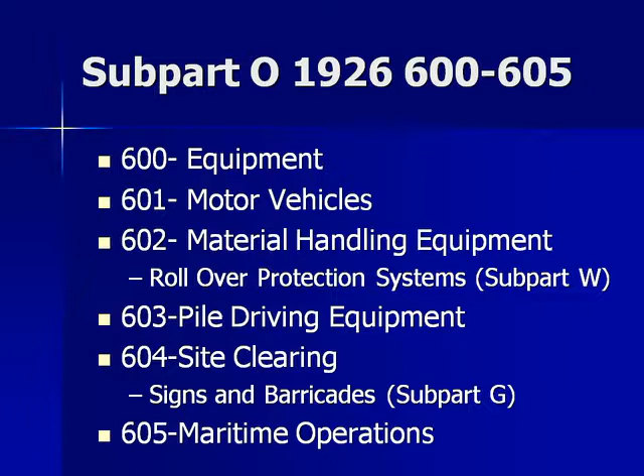Most frequently cited violations for Subpart O. 61 violations: earth moving, compacting equipment, reverse signal alarm. 42: bidirectional machines, horns. 41: industrial trucks, ANSI

B56.1-1969. 38: vehicles with obstructed rear view, alarm, observer. 31: lifting, hauling equipment, use of safety platform.

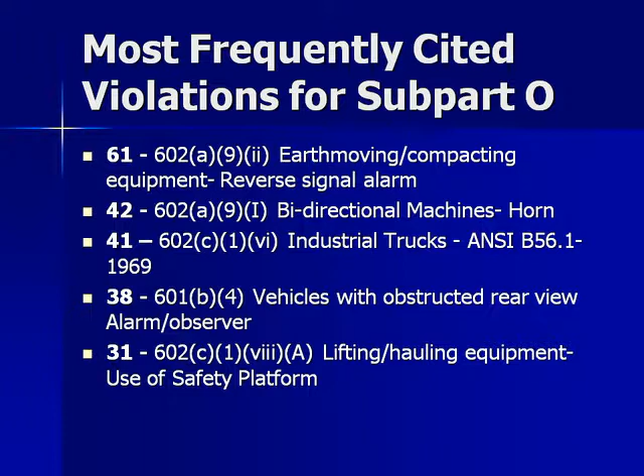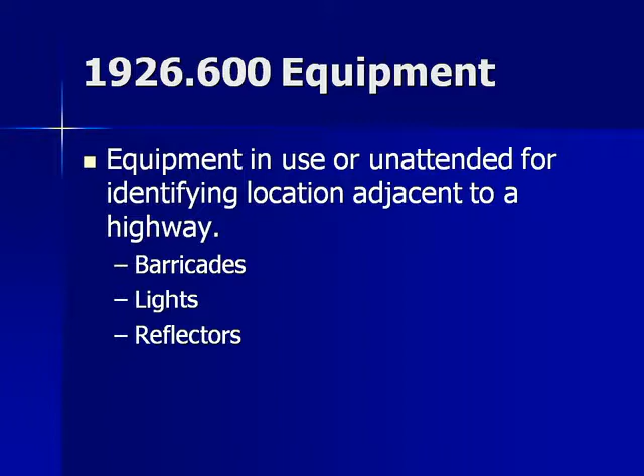1926.600 Equipment. Equipment in use or unattended for identifying location adjacent to a highway: barricades, lights, reflectors. Equipment maintenance. Maintenance of job site equipment. Wheels: split rims or locking ring requirements. Inflating, mounting, dismounting. Tires shall have a safety tire rack, cage.

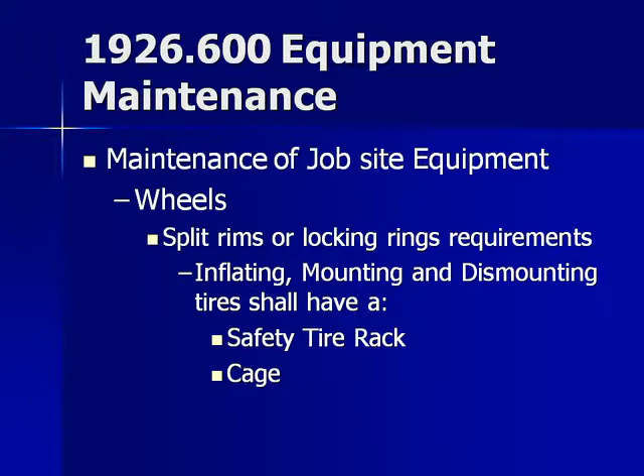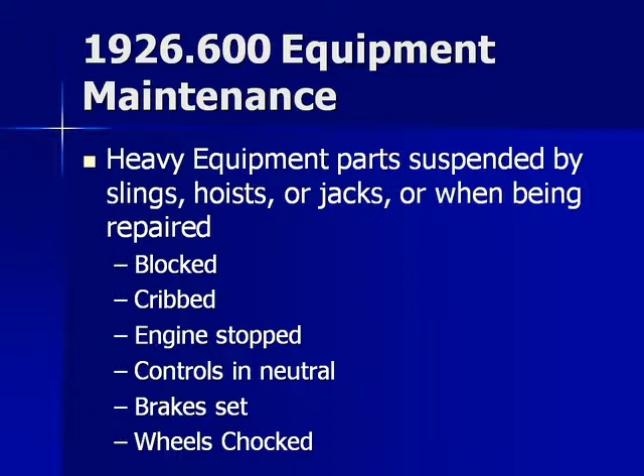Equipment maintenance. Heavy equipment parts suspended by slings, hoists, or jacks, or when being repaired: blocked, cribbed, engine stopped, controls in neutral, brakes set, wheels chocked. Equipment maintenance. Cab glass: safety glass. No cracked glass, no broken glass.

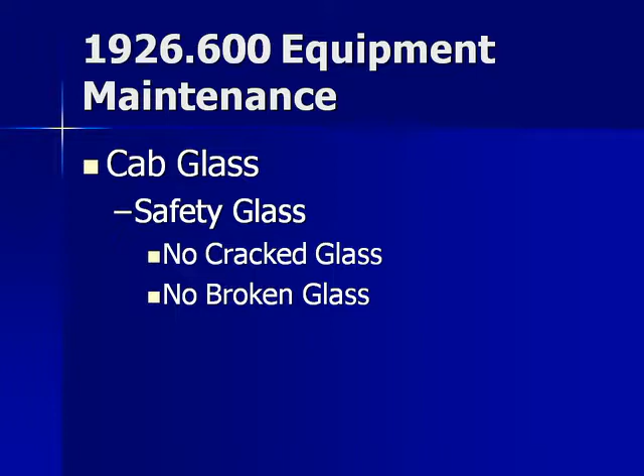Batteries. Charging. Caps in place. Vent caps are functioning. PPE: face shield, aprons, rubber gloves. Emergency eye wash within 25 feet.

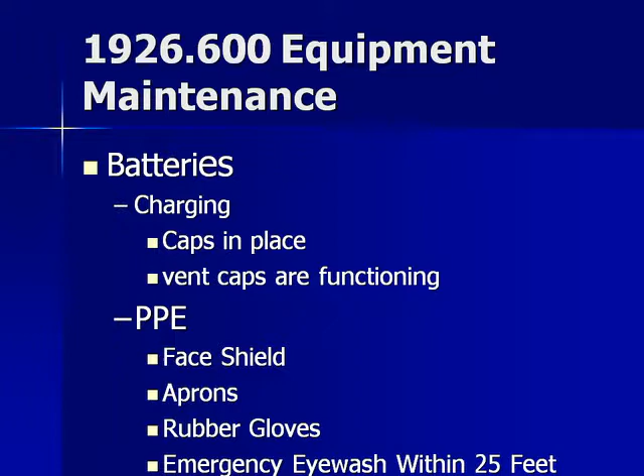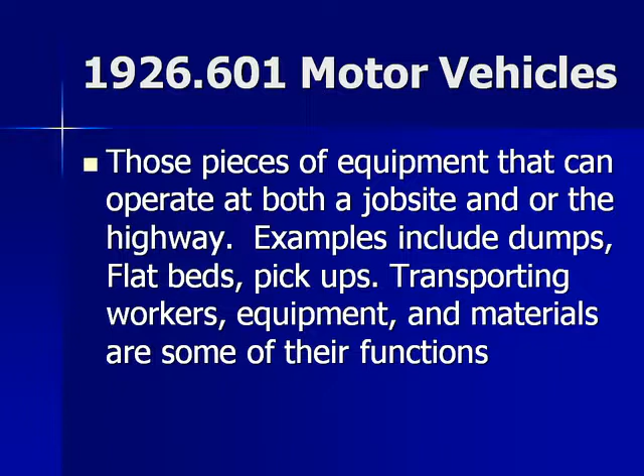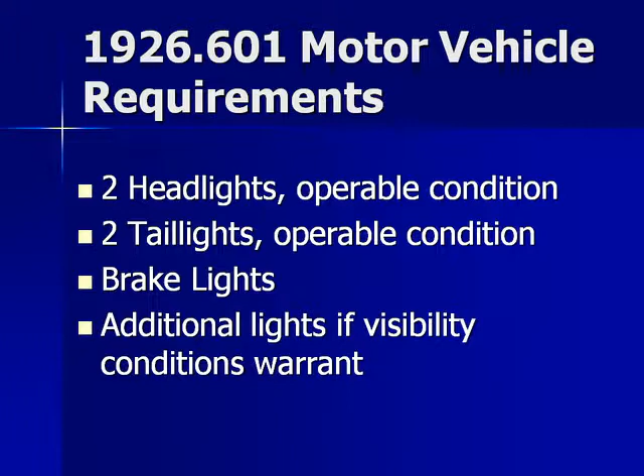601. Motor vehicle requirements. 2 headlights, operable condition. 2 tail lights, operable condition. Brake lights. Additional lights if visibility conditions warrant. Audible warning device, operable. Obstructed view to rear: reverse signal alarm, or an observer signals it's safe to do so.

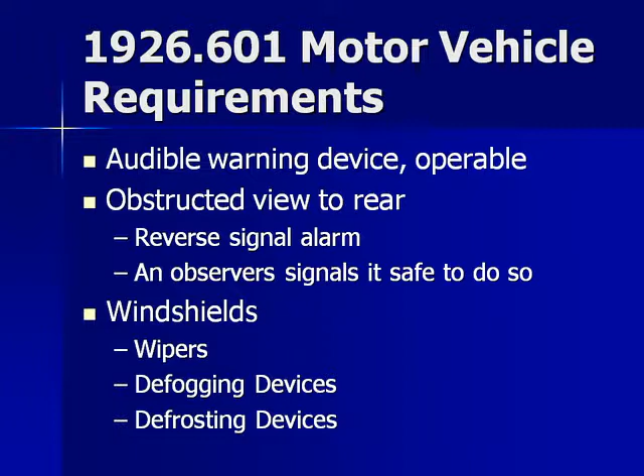Windshields. Wipers. Defogging devices. Defrosting devices. Haulage vehicles loaded by cranes, power shovels, loaders: cab, shield, and/or canopy. Tools secured to prevent movement. Vehicles used to transport employees shall have a seat for each employee. Secured seat belts.

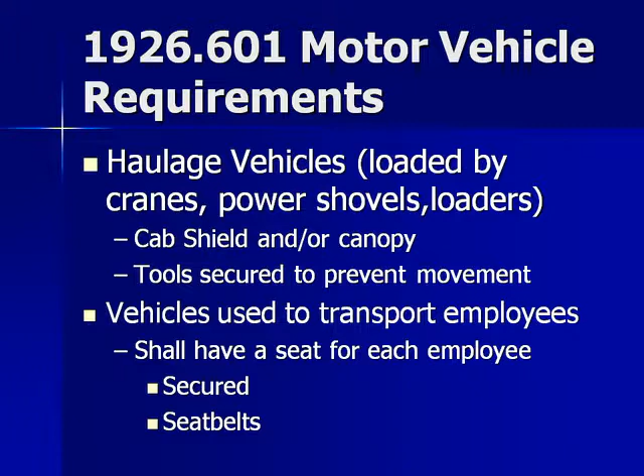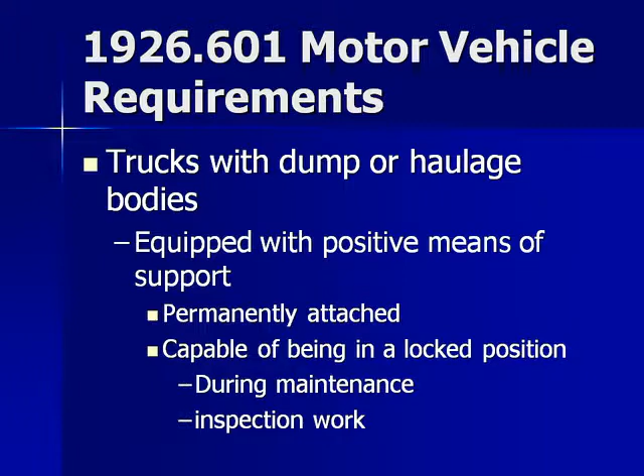Trucks with dump or haulage bodies equipped with positive means of support, permanently attached, capable of being locked in position during maintenance, inspection work. Levers controlling hoisting or dumping body devices equipped with a latch or other device that prevents accidental starting or tripping of mechanism. Tailgate trip handles arranged so that the operator will be in the clear.

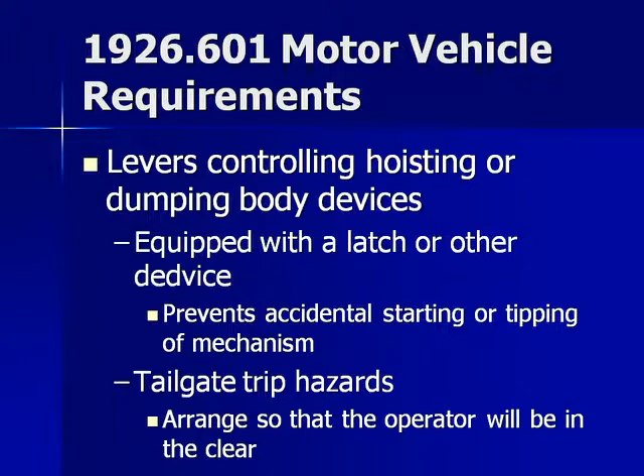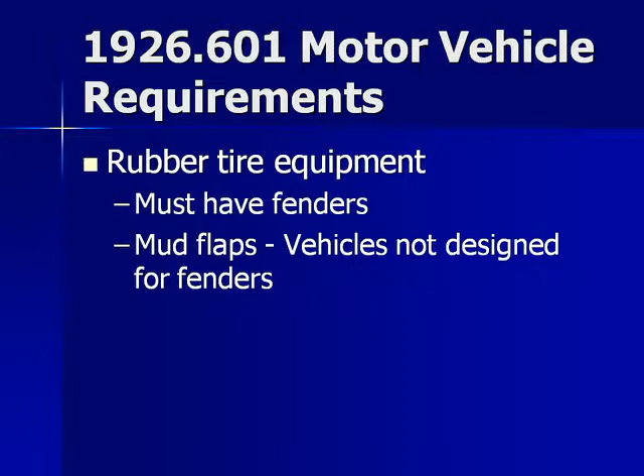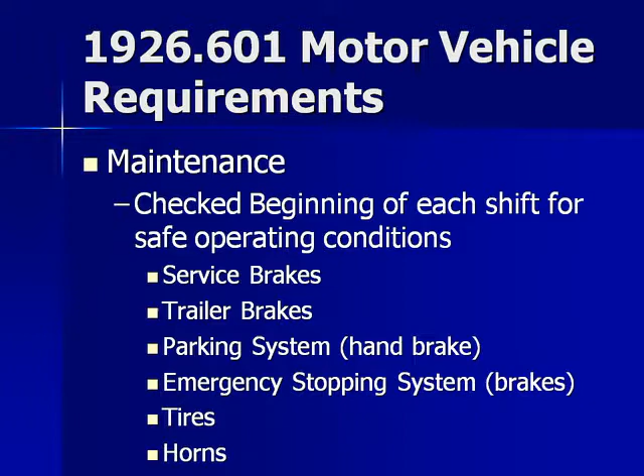Rubber tire equipment must have fenders; mud flaps for vehicles not designed for fenders. Maintenance: checked at beginning of each shift for safe operating conditions. Service brakes, trailer brakes, parking system, handbrake, emergency stopping system, brakes, tires, horns, steering mechanism, coupling devices, seat belts, operating controls, safety devices, lights, reflectors, windshields, wipers, defrosters, fire extinguishers.

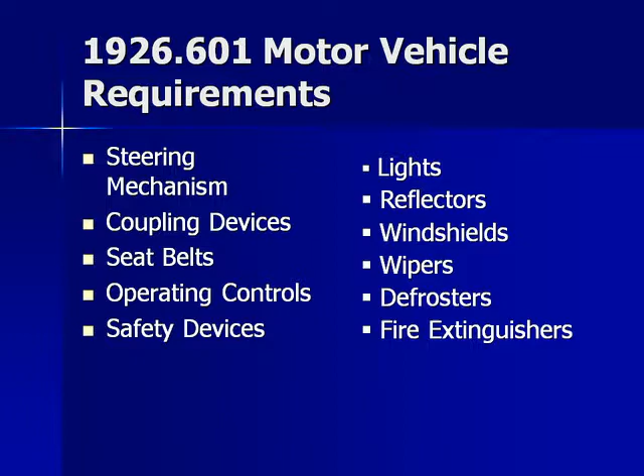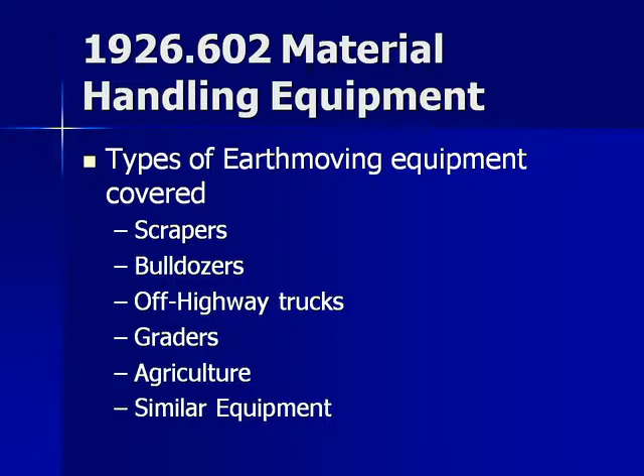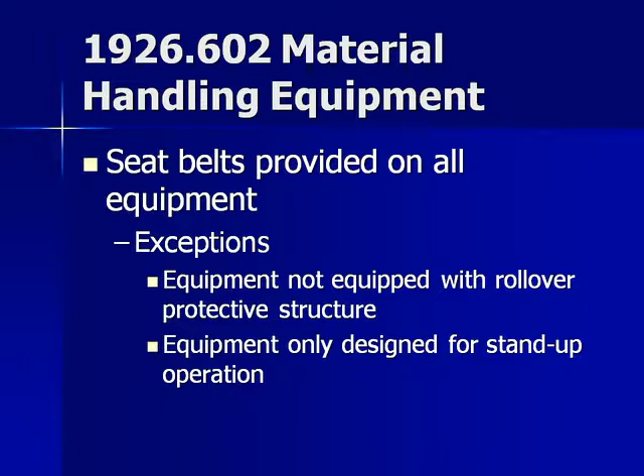Types of earth-moving equipment covered: scrapers, bulldozers, off-highway trucks, graders, agricultural, similar equipment. Material handling equipment. Seat belts provided on all equipment. Exceptions: equipment not equipped with rollover protective structure. Equipment only designed for stand-up operation.

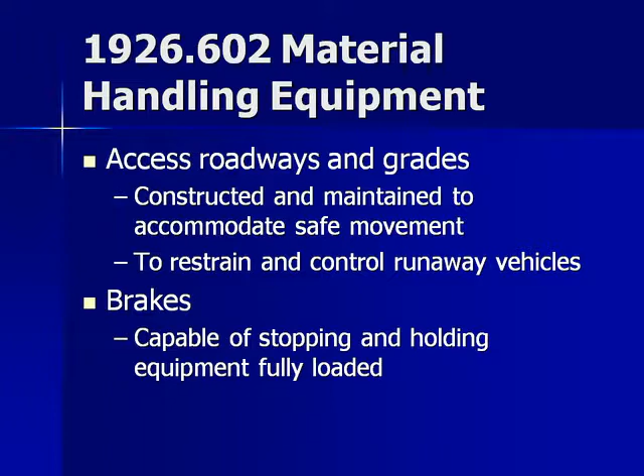Access roadways and grades constructed and maintained to accommodate safe movement, to restrain and control runaway vehicles. Brakes capable of stopping and holding equipment fully loaded. Audible alarms on all bidirectional machines. Distinguishable from surrounding noise levels. Operable when needed, when machine is moving in either direction. Maintained in operative condition.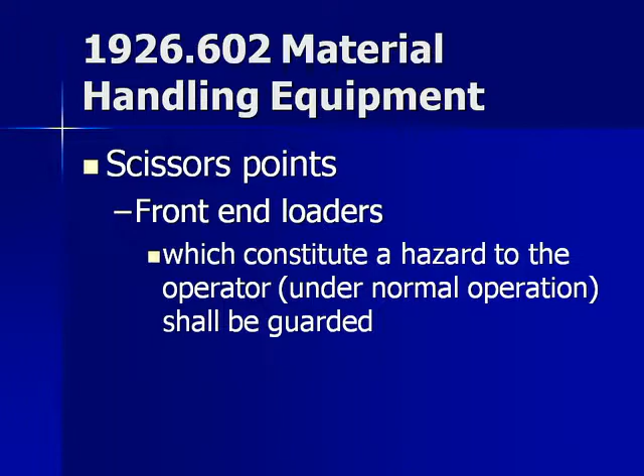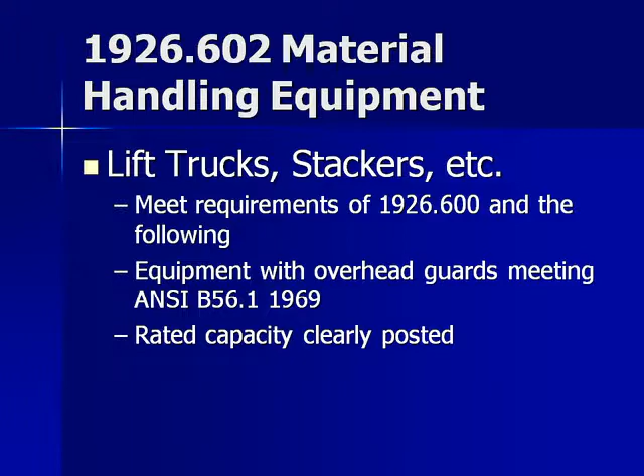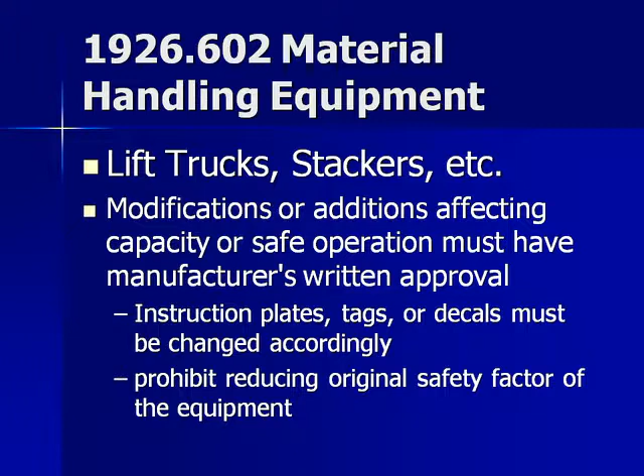Lift trucks, stackers, etc. meet requirements of 1926.600 and the following. Equipment with overhead guards meeting ANSI B56.1-1969. Rated capacity clearly posted. Modifications or additions affecting capacity or safe operation must have manufacturer's written approval. Instruction plates, tags, or decals must be changed accordingly. Prohibit reducing original safety factor of the equipment.

1926.603 Pile driving equipment. General requirements. Boilers and piping systems must meet the requirements of the ASME power boilers. Pressure vessels must meet the requirements of the ASME pressure vessels. Overhead protection: equivalent of 2-inch planking or other solid material of equivalent strength.

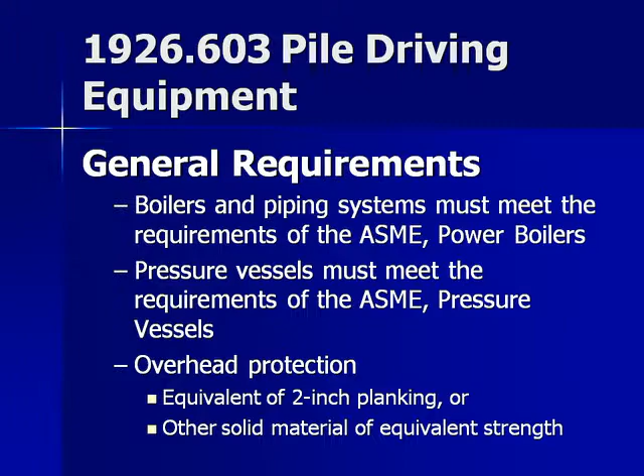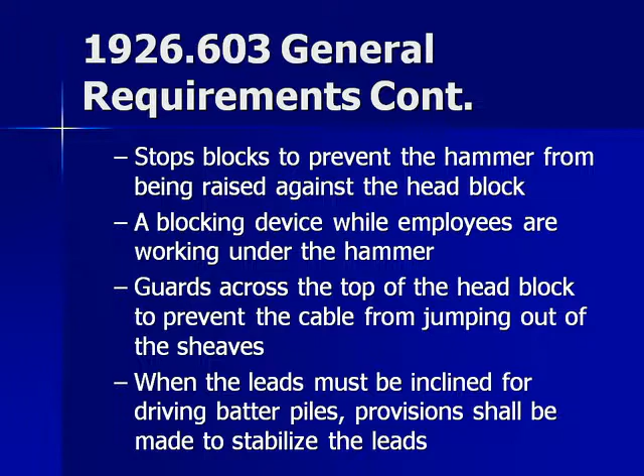General requirements continued. Stop blocks to prevent the hammer from being raised against the head block. A blocking device while employees are working under the hammer. Guards across the top of the head block to prevent the cable from jumping out of the sheaves. When the leads must be inclined for driving batter piles, provisions shall be made to stabilize the leads.

Fixed leads shall be provided with ladder and adequate rings so the loft worker can attach a lanyard to the leads. If the leads have loft platforms, standard guardrails must be in place. Steam hose leading to a steam hammer or jet pipe shall be securely attached. Air hammer hoses shall be provided with the same protection.

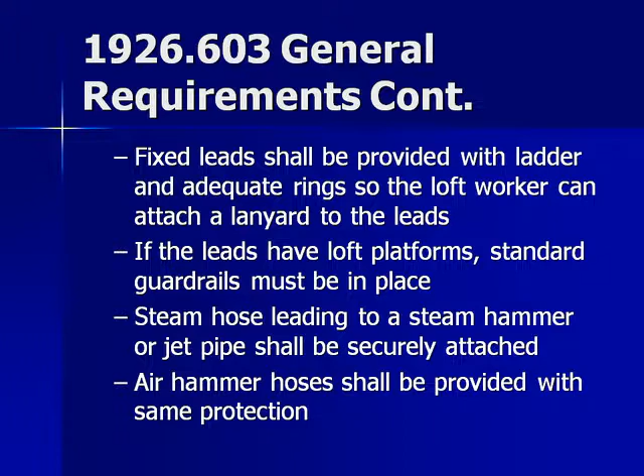Safety chains, 1/4 inch for each hose connection. Steam lines must consist of 2 shutoff valves. Guys, outriggers, thrust outs, or counterbalances to maintain stability of pile driver rigs.

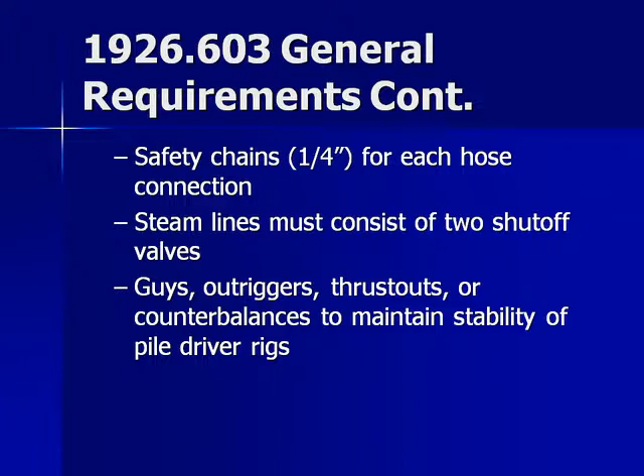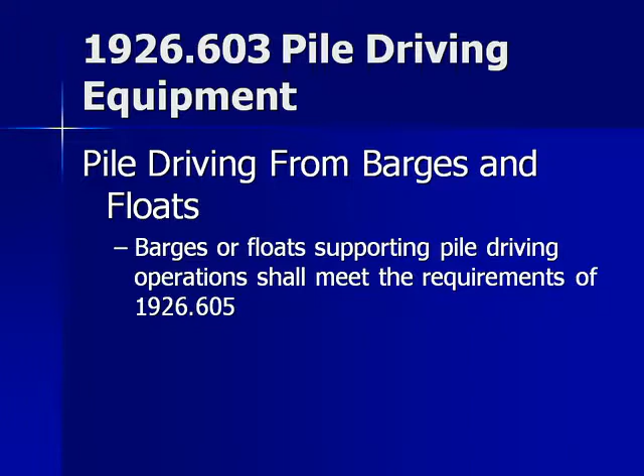Pile driving equipment. Engineers and winchmen accept signals only from designated signalmen. Employees shall be kept clear when piling is being hoisted into the leads. When piles are being driven in an excavated pit, walls shall be sloped or sheet piled and braced.

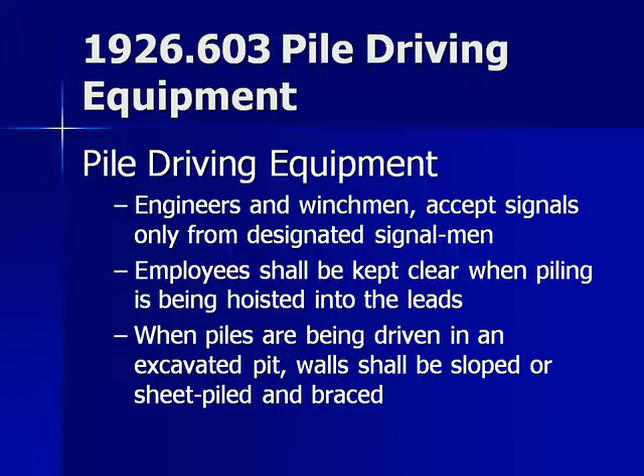Pile driving equipment, continued. When steel tube piles are being blown out, employees shall be kept beyond the range of falling material. When cutting off the tops of driven piles, pile driving operations shall be suspended except where the cutting operations are located at least twice the length of the longest pile from the driver.

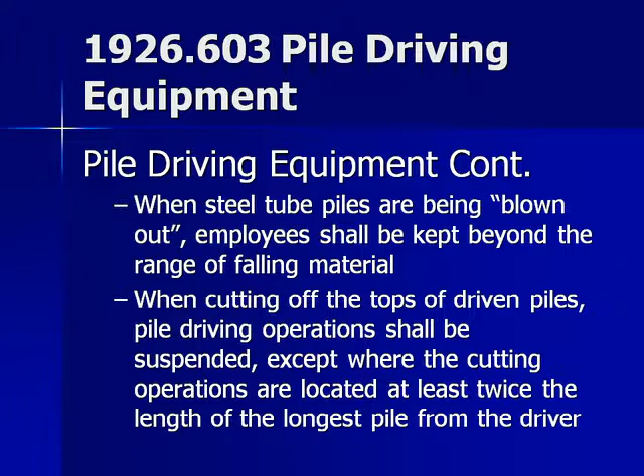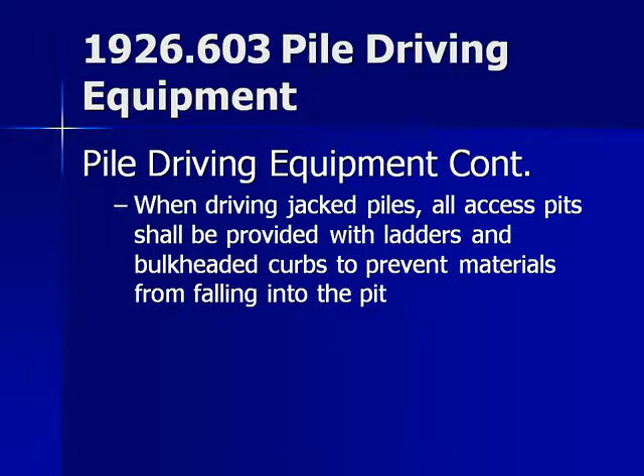When driving jacked piles, all access pits shall be provided with ladders and bulkheaded curbs to prevent materials from falling into the pit.

1926.604 Site Clearing. A. General requirements. 1. Employees engaged in site clearing shall be protected from hazards of irritants and toxic plants and suitably instructed in first aid treatment available.

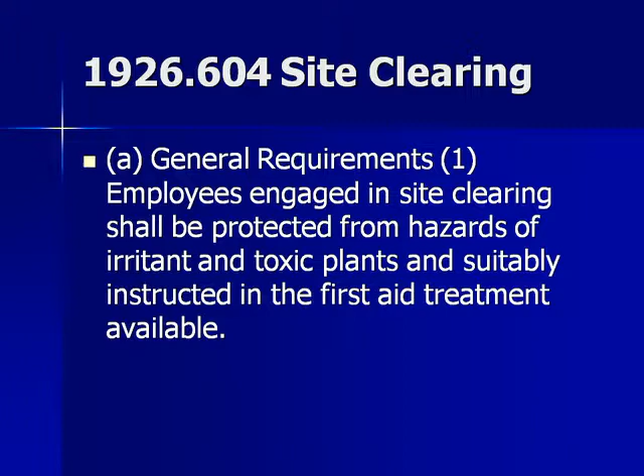Environmental assessment. Make a determination of inherent hazards and potential exposure. Snakes, wasps, poisonous vegetation, accessibility to the clearing site, time to medical facility, fire potential, water availability, hazard communication, MSDS, PPE storage use.

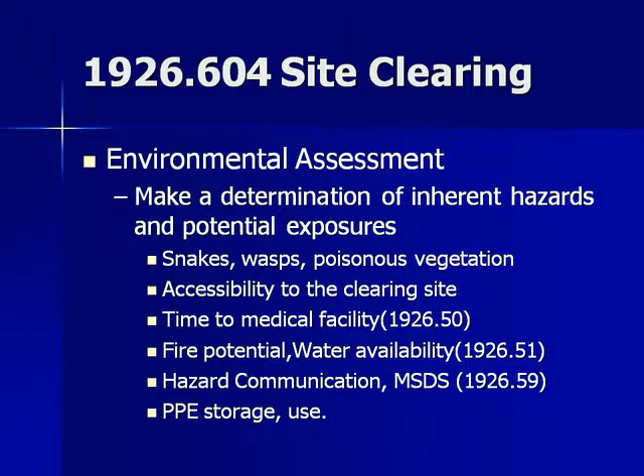ROPS, 1926.1000 through 1003. Objective: to minimize the likelihood of a complete overturn and thereby minimize the possibility of the operator being crushed as a result of a rollover or upset.

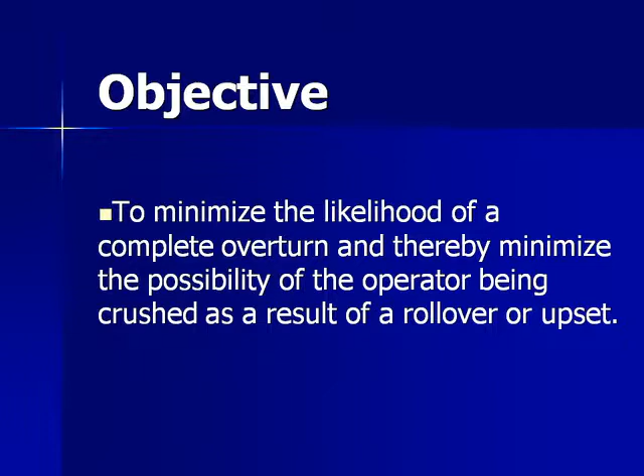ROPS, rollover protective structures. All equipment manufactured from September 1, 1972 to present must have ROPS. Labeled information: manufacturer or fabricator's name, ROPS model number, if any, machine make, model, or series number that the structure is designed for.

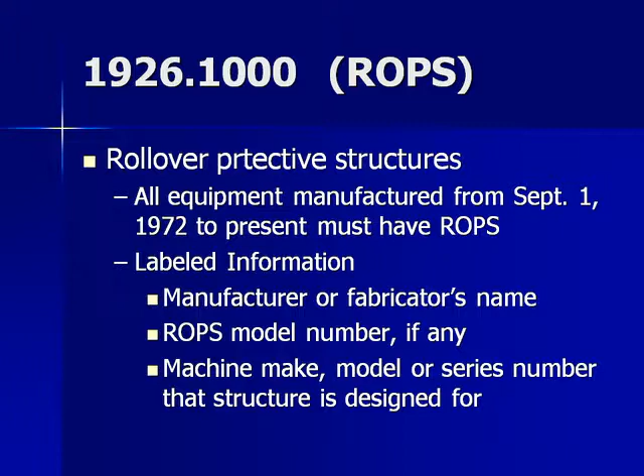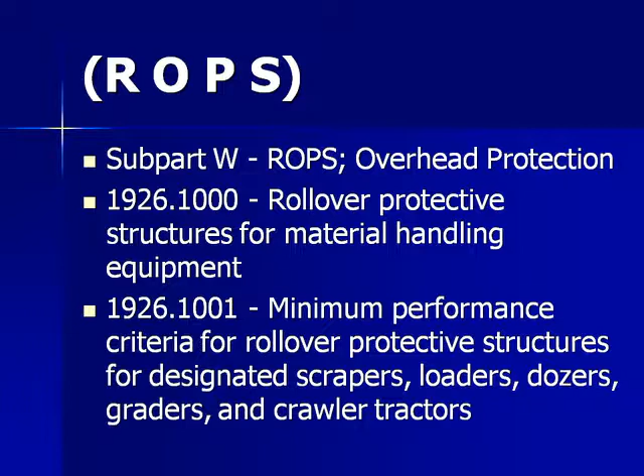Rollover protective structure, Subpart W. ROPS, overhead protection. 1926.1000, rollover protective structures for material handling equipment. 1001, minimum performance criteria for rollover protective structures for designated scrapers, loaders, dozers, graders, or crawler tractors.

.1002, protective frames, rollover protective structures for wheel-type agricultural or industrial tractors used in construction. .1003, overhead protection for operators of agricultural and industrial tractors.

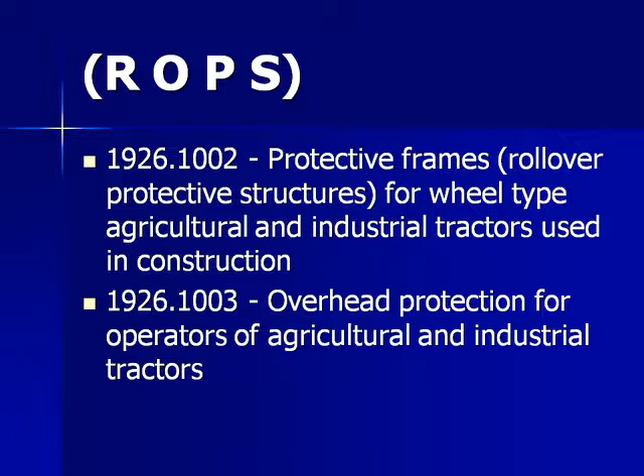All rubber-tired self-propelled scrapers, rubber-tired front-end loaders, rubber-tired dozers, wheel-type agricultural and industrial tractors, crawler tractors, crawler-type loaders, and motor graders.

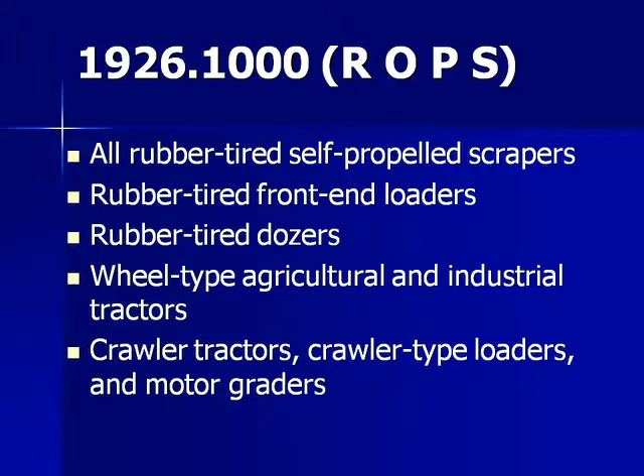Compactor and rubber-tired skid steer equipment. ROPS for equipment listed above is reserved pending consideration of standards currently being developed.

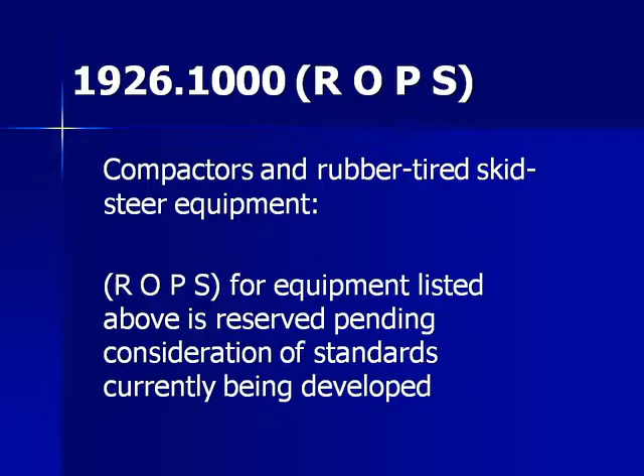ROPS must meet minimum performance criteria detailed in 1926.1001 and 1926.1002, or shall be designed, fabricated, and installed in a manner which will support, based on the ultimate strength of the metal, at least 2 times the weight of the prime mover applied at the point of impact.

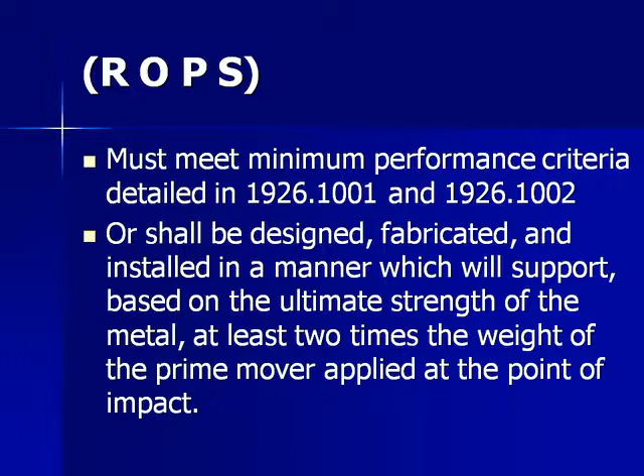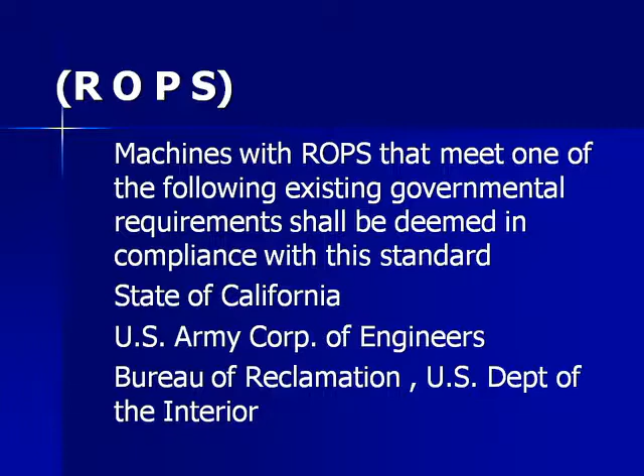Machines with ROPS that meet one of the following existing governmental requirements shall be deemed in compliance with this standard: State of California, U.S. Army Corps of Engineers, Bureau of Reclamation, U.S. Department of Interior.

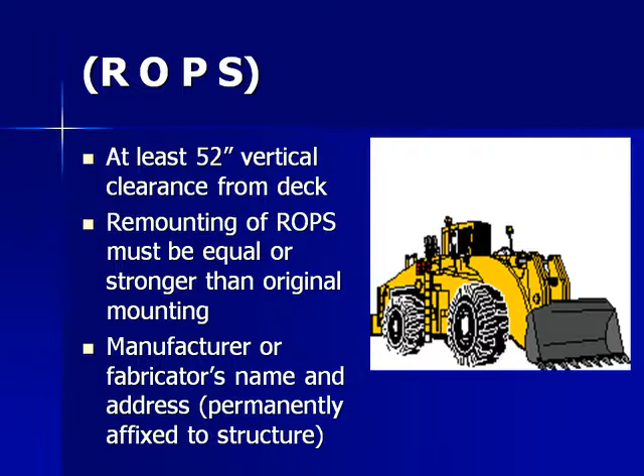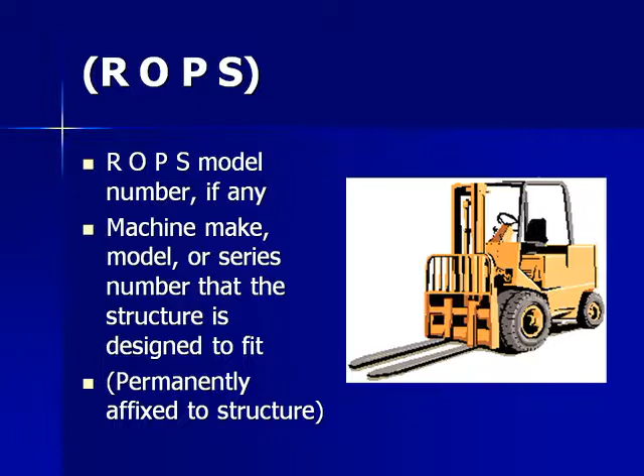At least 52-inch vertical clearance from deck. Remounting of ROPS must be equal or stronger than original mounting. Manufacturer or fabricator's name and address permanently affixed to structure. ROPS model number, if any, machine make, model, or series number that the structure is designed to fit, permanently affixed to structure.

ROPS. 1926.1001 covers the minimum performance criteria for rollover protective structures for designated scrapers, loaders, dozers, graders, and crawler tractors.

Test procedures shall verify energy absorbing capabilities of ROPS, verify the support capability to cover the possibility of the vehicle coming to rest on its top, and verify low temperature impact strength of material used in ROPS.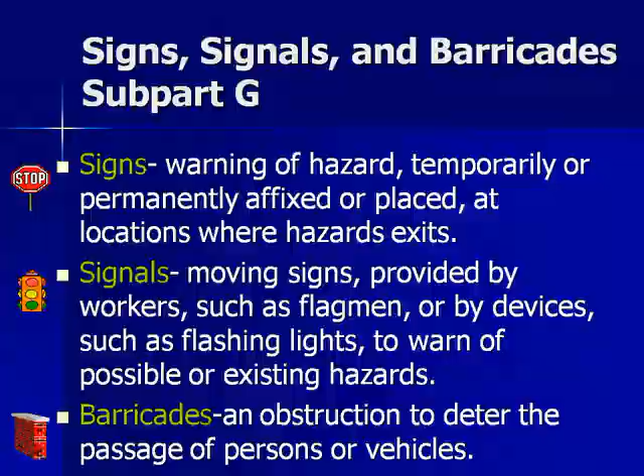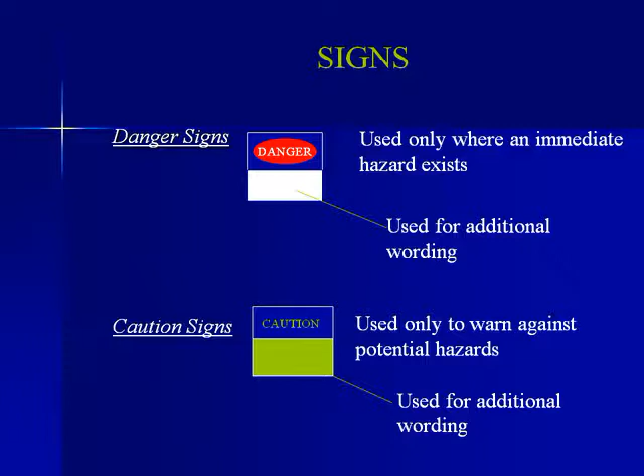Signs. Danger signs: used only where an immediate hazard exists. This blank space is used for additional wording. Caution signs: used only to warn against potential hazards. This blank space is used for additional wording. Exit signs: background must be white. Letters must be red, minimum 6 inches high and 3/4 inch wide.

Traffic signs shall conform with ANSI D6.1-1971, Manual on Uniform Traffic Control Devices for Streets and Highways. Certain state guidelines may pertain to work activity, PA Publication 203.

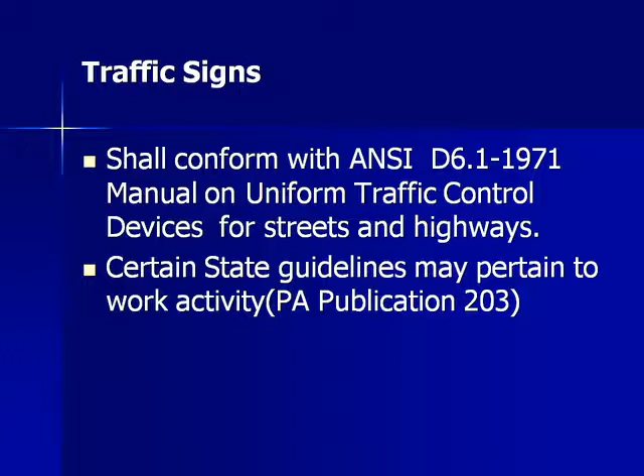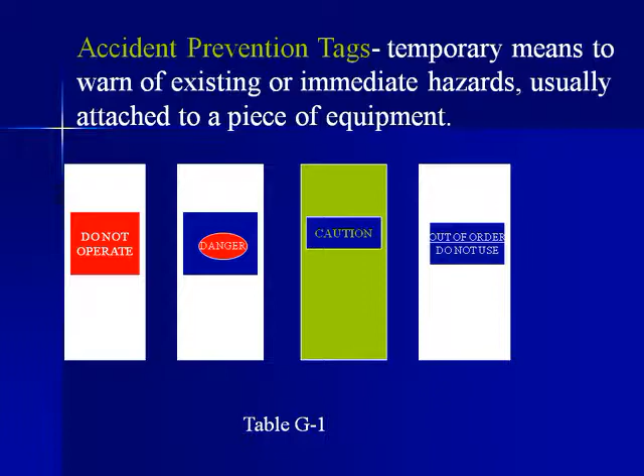Accident prevention tags. Temporary means to warn of existing or immediate hazard, usually attached to a piece of equipment. Examples shown: do not operate, danger, caution, out of order, do not use. Table G-1.

Signaling. Flagman. Used when signs, signals, and barricades do not provide the necessary protection on or adjacent to a highway or street. Signaling direction shall conform to ANSI D6.1-1971. Must wear red or orange garment during flagging. Must wear reflective material during night operations.

Flags or paddles must be 18 inches square. Red lights must be used during darkness. May also conform to Publication 203.

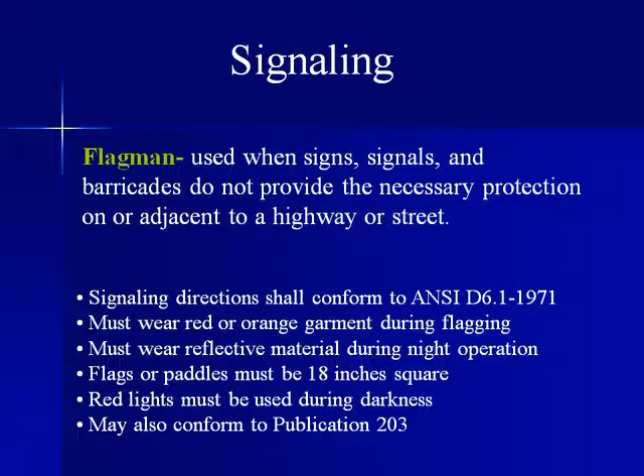A flagger should have pride: be professional and have a neat, clean appearance, be alert and properly positioned, responsive, and able to adjust to changing conditions, informed and properly briefed by the supervisor on limits of work area, decisive, and give signals that are clear, effective, and able to efficiently control the flow of traffic.

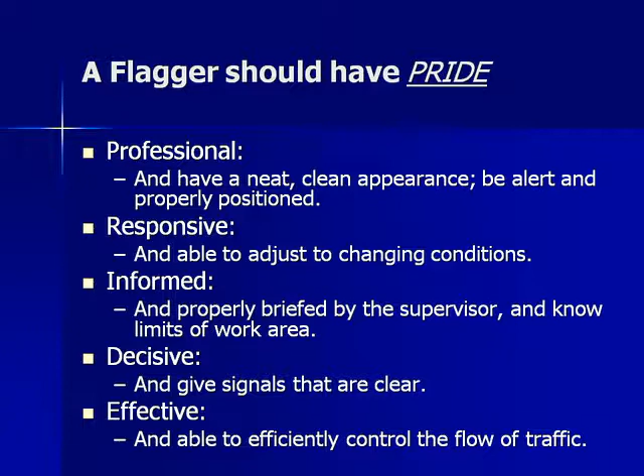Barricades shall conform to ANSI D6.1-1971, Manual on Uniform Traffic Control Devices for Streets and Highways relating to barricades. This concludes the presentation on signs, signals, and barricades.